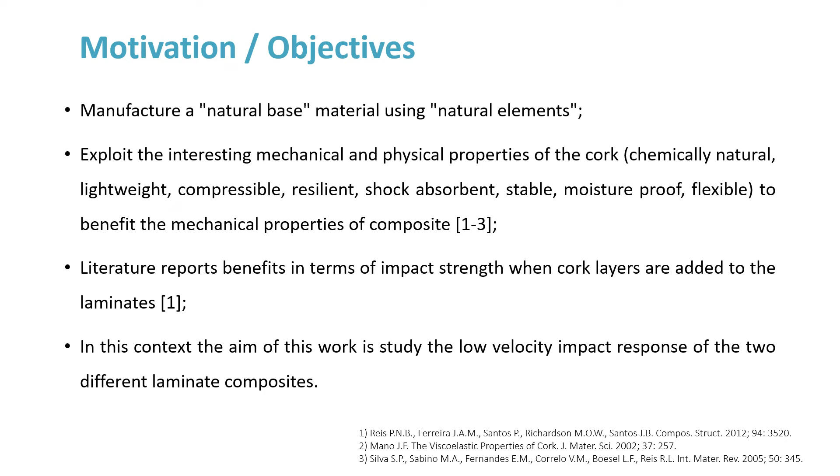Literature reports benefits in terms of impact strength when cork layers are added to the laminates. In this context, the aim of this work is to study the low-velocity impact response of two different laminate composites.

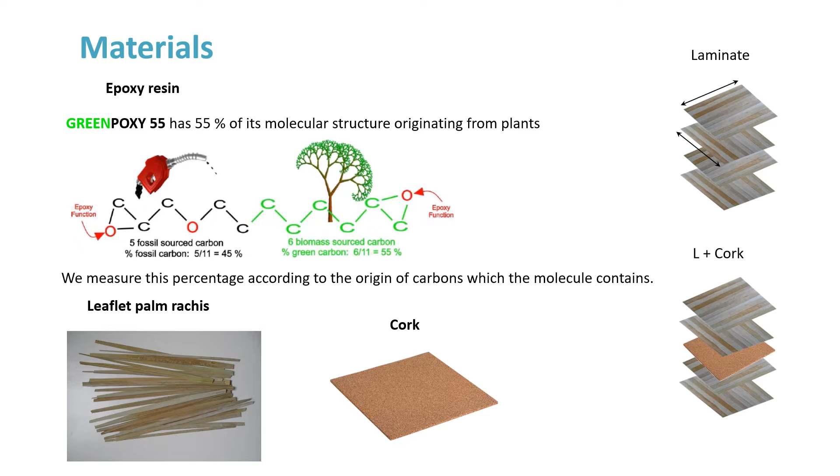The manufacture of laminates consists of 4 steps. Step 1: resin preparation with hardener and alignment of leaflet palm rachis and cork. Step 2: the system of 4 layers of leaflet palm rachis plus cork plus epoxy resin was produced by wet layup technique at room temperature and then placed inside a vacuum bag for 24 hours.

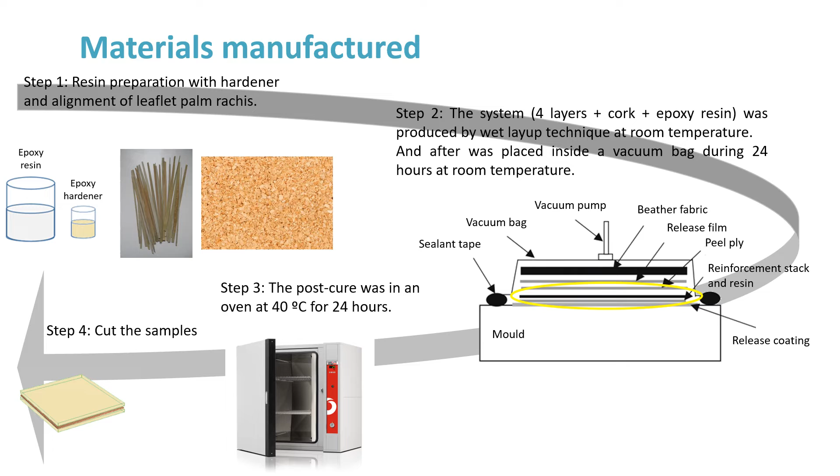Step 3: the post-cure followed the manufacturer datasheet in an oven at 40 degrees for 24 hours. Finally, the samples were cut with the appropriate dimensions for the respective mechanical tests.

Low-velocity impact tests were performed using a drop weight testing machine, IMATEK-IM10, with an impactor diameter of 20 mm and a mass of 3 kg. The tests were performed on square section samples of 75 by 75 mm, with the impactor striking the center of the samples, obtained by centrally supporting the 100 by 100 mm specimens. The impact energies used in the tests were 1, 2 and 3 joules.

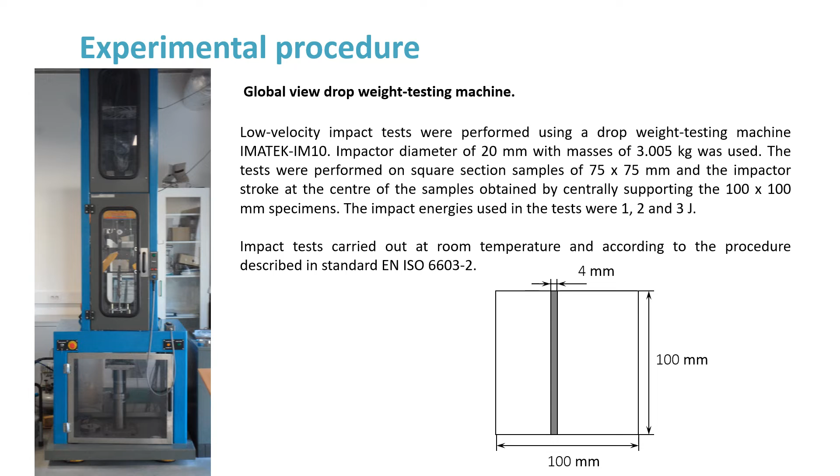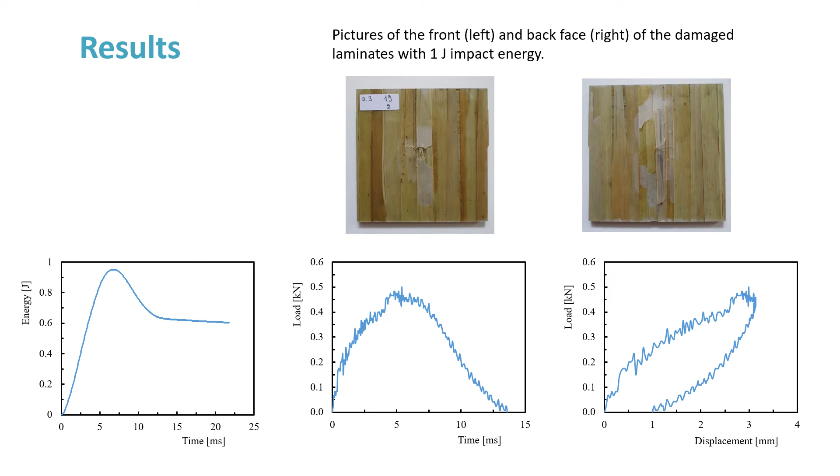The figure shows the energy versus time, load versus time, and load versus displacement curves for laminates. These diagrams represent a typical behavior for all laminates. Impact tests were carried out at different incident impact energy levels, namely 1, 2, and 3 joules.

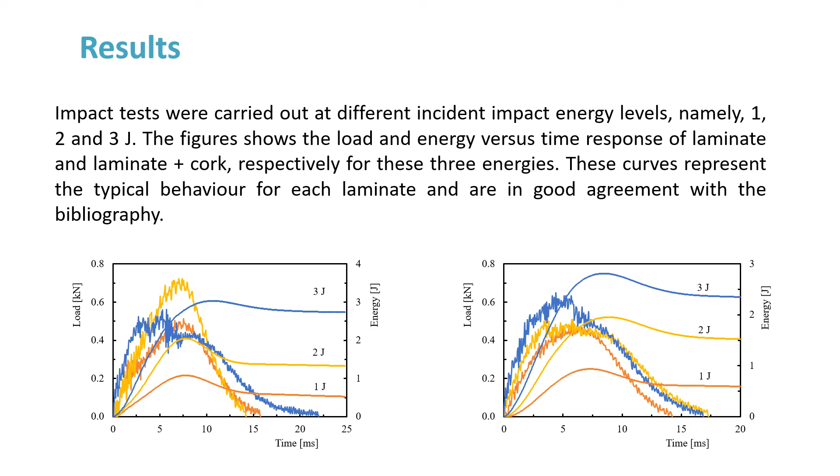The figures show the load and energy versus time response of laminate and laminate plus cork, respectively. For these three energies, these curves represent the typical behavior of each laminate and are in good agreement with the bibliography.

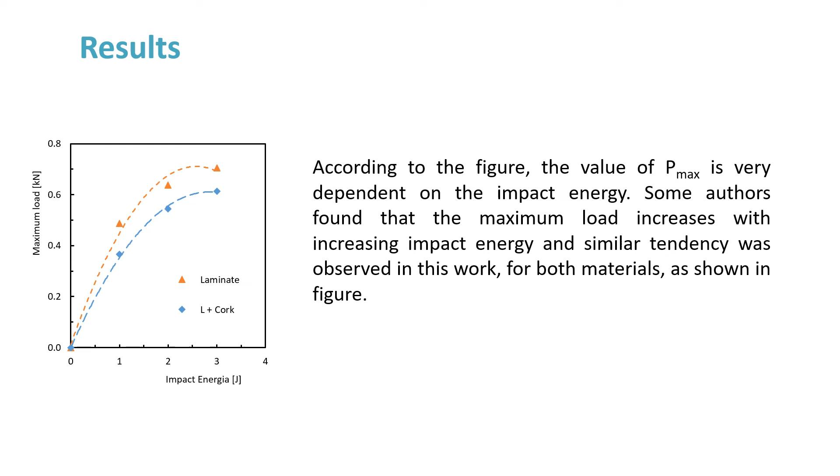According to the figure, the value of maximum load is very dependent on the impact energy. Some authors found that the maximum load increases with increasing impact energy, and a similar tendency was observed in this work for both materials, as shown in the figure.

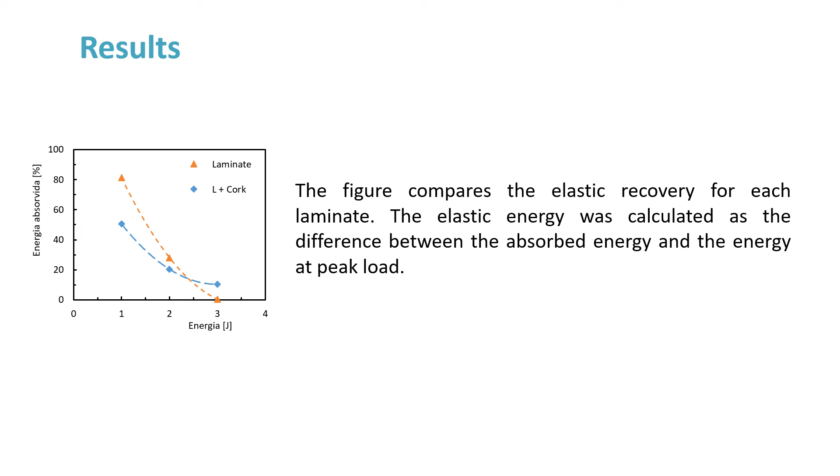The figure compares the elastic recovery for each laminate. The elastic energy was calculated as the difference between the absorbed energy and the energy at peak load.

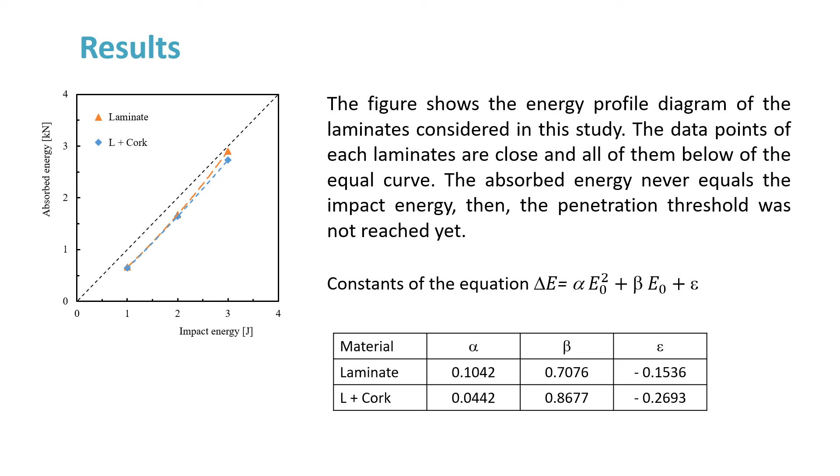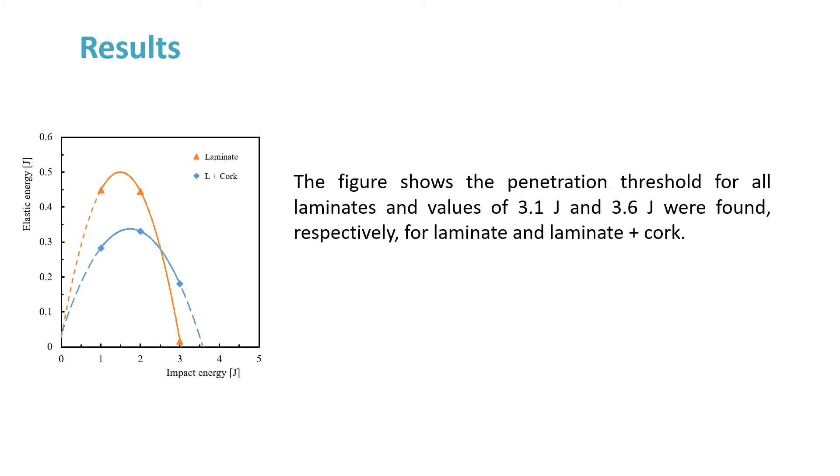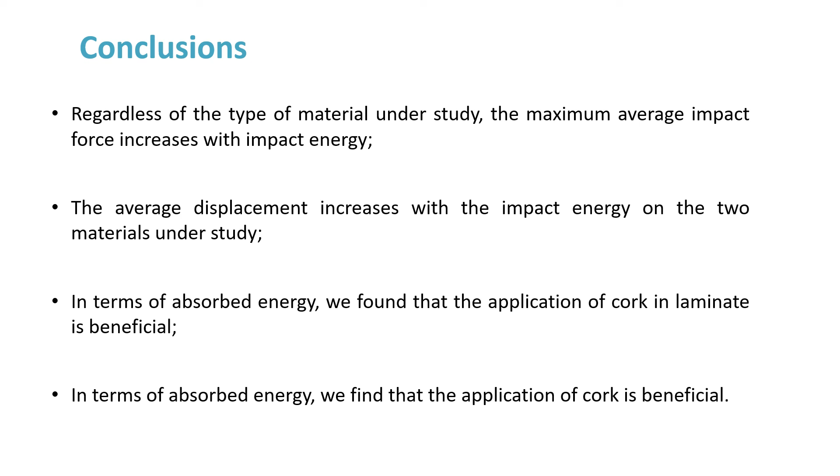Conclusions. Regardless of the type of material, the maximum average impact force increases with impact energy. The average displacement increases with the impact energy for the two materials under study. In terms of absorbed energy, we found that the application of cork in laminates is beneficial.